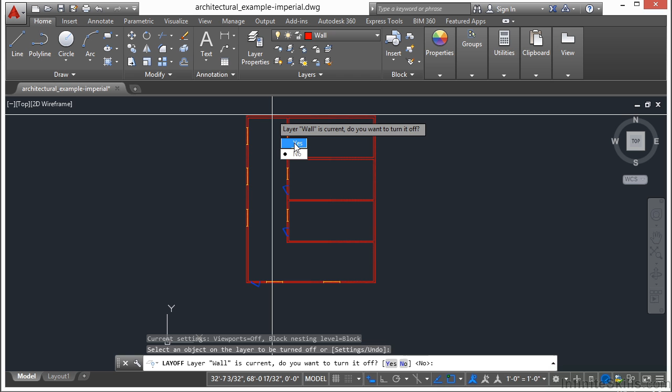Now, whether you choose to freeze layers or turn them off depends on how you work, on the size of your drawings, and what it is exactly that you want to do. Turning off a layer, you can do that by clicking right here. Click the off button and then select an object to turn off. If that layer is current, you'll get this warning. It'll say, hey, this is the current layer. If you turn this off, everything you draw is going to be unseen.

So that line work is turned off. I can't see it anymore. And since that's the current layer, and you can see right here it has the bluish grayish light bulb, that means it's off. Whenever I draw a new object, I can't see it, but it's still there. If I click this button here, that will turn all layers back on, and you can see my new object is right over there.

When you turn on or off an object, the objects are turned off, meaning that the layers are invisible, but they still hide objects when you use the hide option when you're printing or working in 3D. When you turn layers off, then the drawing is not self-regenerated. When you freeze a layer or thaw it, objects on the frozen layers are invisible, but they don't hide other objects behind them in doing like 3D work.

Now, in large drawings, freezing unneeded layers speeds up operations involving your display features and regeneration. So AutoCAD can handle it better when you freeze layers as opposed to turning them off. Thawing one or more layers may cause the drawing to automatically regenerate itself, so you can keep that in mind. This used to be a big deal a long time ago on older machines when it was just very hard for the computer to keep up with what you were trying to do in AutoCAD. Today's machines, it's not so much of an issue.

Freezing and thawing layers, though, does take more time on the computer side of things than turning layers on and off. Though, to be honest, I have no idea about that difference. I can't tell it. That just comes out of AutoCAD's help, and it tells us that.

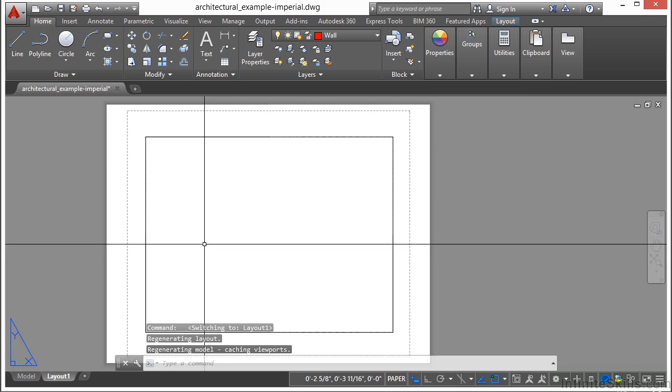In a layout or in paper space, if I go to a paper space tab, click in my viewport, and I have my objects shown here. I'm going to lock my viewport so that I can zoom in and out, and I can see my different objects. Now, when I'm in a layout, I can freeze layers in an individual layout or an individual viewport. This box here, this black box, is called a viewport. It gives me a look into the model space where my model is, and it can allow me to display my drawing in a specific way.

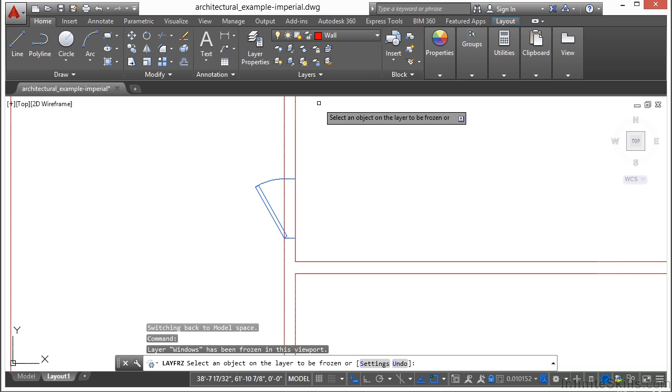I can freeze objects in a specific viewport. So if I use the freeze command, it's right here on the layers panel. If I select that, let's say I don't want to show my windows in this viewport, I can freeze that layer. My windows are gone. If I go back to model space, you'll see they're still here. They just aren't being displayed.

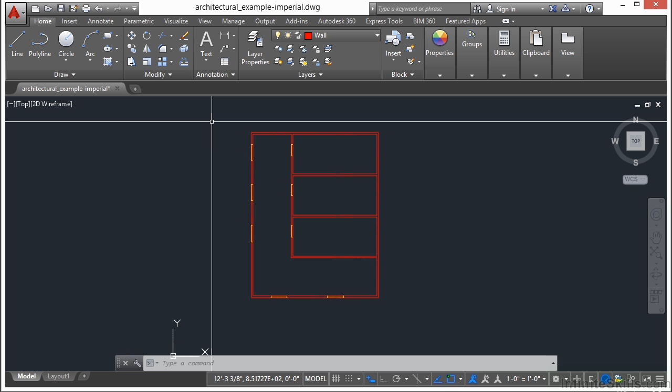Now, if I turn off a layer, like my doors, they won't be displayed in this viewport, but in fact, they're going to be turned off everywhere. That's the biggest difference that you will actually use in all practicality between off and freeze. When you turn a layer off, it's off everywhere in that file. When you freeze it, it can be frozen only in one viewport at a time. Now, you can freeze it in multiple viewports, but it has to be done one at a time. That way you can turn off those objects in that view, but keep them on in another view.

When you lock a layer, you make sure that everything on that layer cannot be edited. I can't delete it, I can't move it, I can't copy it, can't do anything to it. It is safe. So when you get a part of your design done or finished, lock those layers. That way it won't accidentally be changed, and it tells everyone else, hey, I'm done with this, don't touch it. Leave it alone.